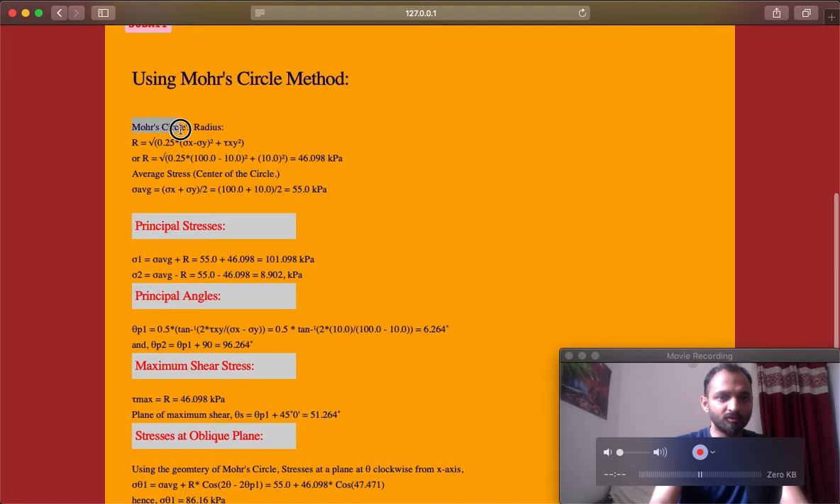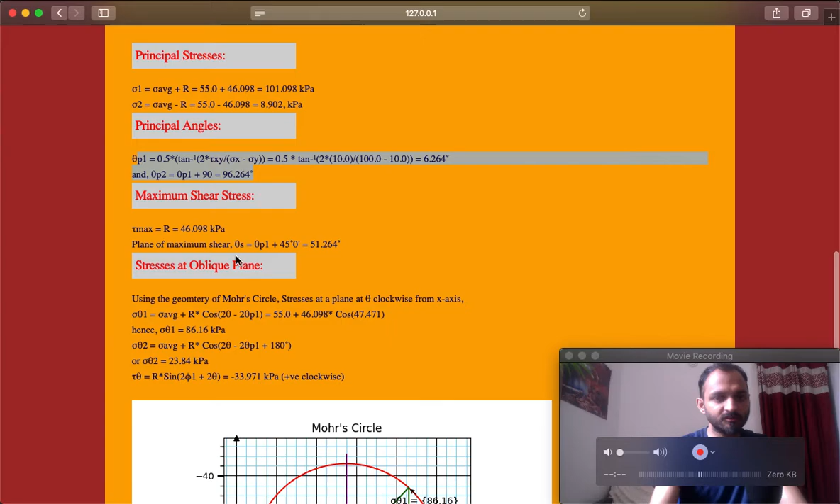Using the Mohr circle method, because we chose Mohr circle, here is the Mohr circle radius, principal stresses, principal angles meaning the planes at which these principal stresses occur, then maximum shear stress is given here. Stresses at the oblique plane, so this is your oblique plane, and this is your Mohr circle.

You can see that you get your sigma theta 1 and tau theta 1, the stresses at that particular angle theta, which is 30 degrees, and 30 degrees from this sigma x tau xy, so this is 2 theta, that is equal to 60 degrees. So this is a Mohr circle.

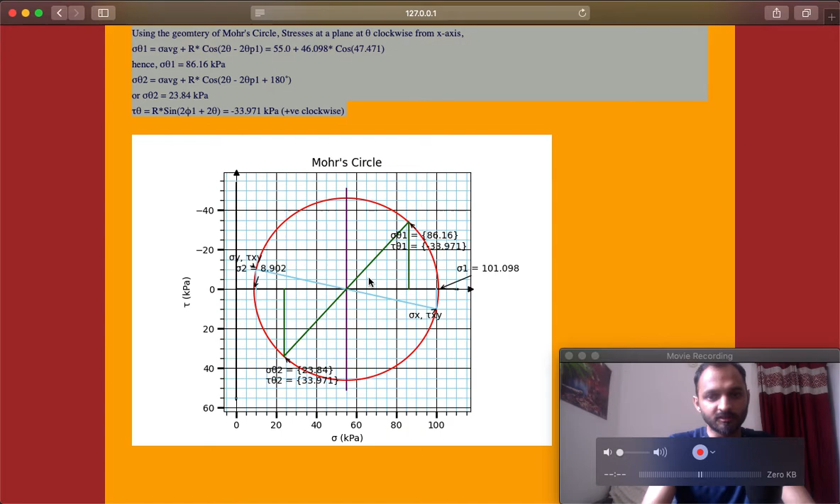Let us try some different values. Let's suppose our sigma x is 30, sigma y is minus 10, and tau xy let's take it 10 again, and theta let's take it 45, and let's choose both methods. Submit.

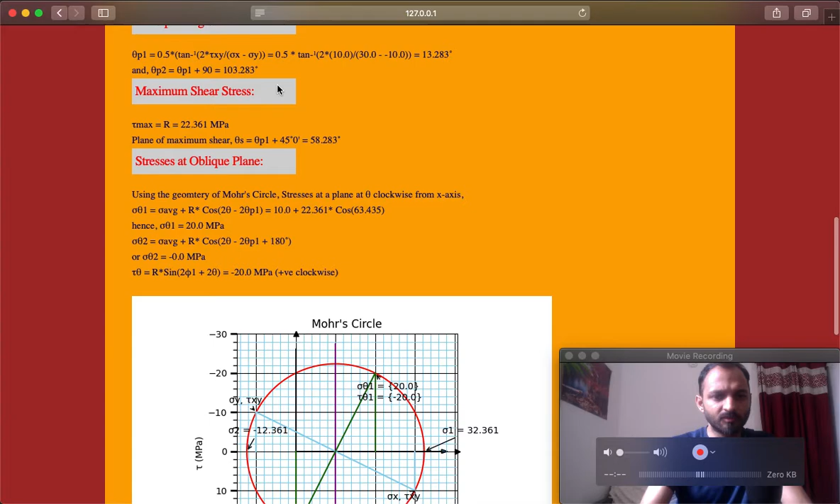Using the Mohr circle method, this is your first method. Now you can see that this plane is at 90 degrees from here, that is 2 theta, because theta was 45.

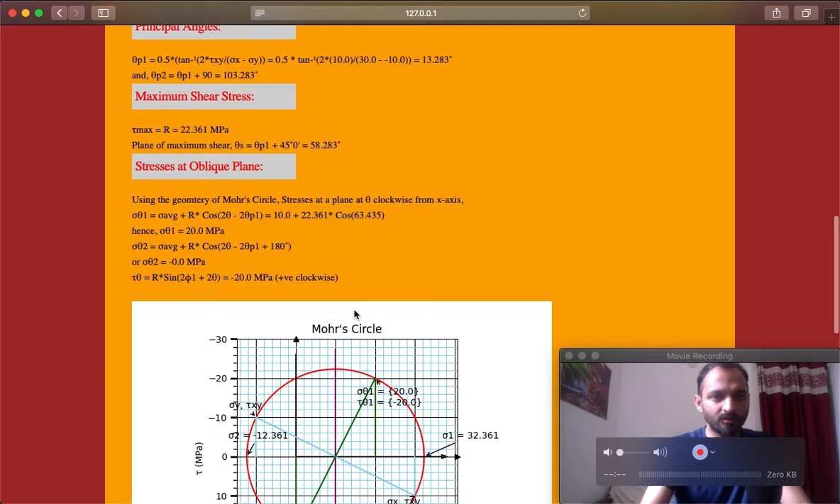Alright, so theta we have taken this time was 45. This is the Mohr circle method, and now you're using stress transformation equations. It gives you the stress transformation equations here and all the solutions using the equations. So this is your first step.

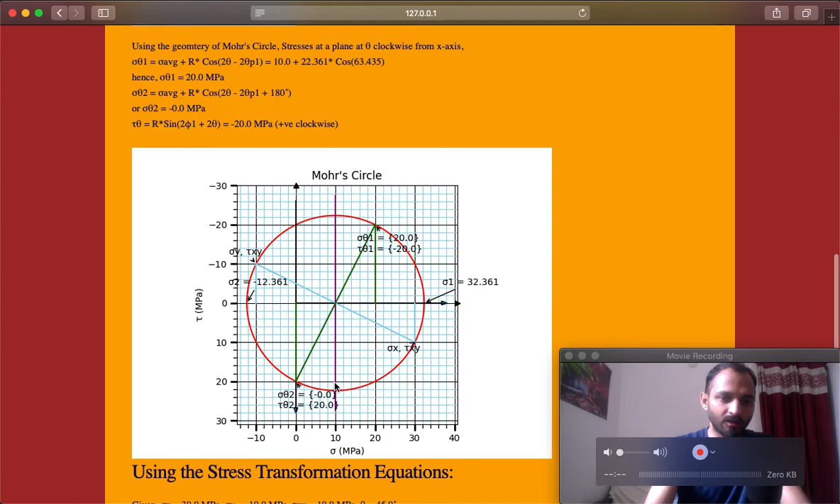You can draw a Mohr circle for any stresses, any kPa, MPa, and you can see that these units also get displayed here. So in MPa, everything is annotated, even in the diagram, not just the answer, everywhere it is annotated like this. Each step is explained, so this is programmed in such a way that your solution would be complete.

Okay, let us check now the vertical curve app, my second app here. So let us suppose, as you know, vertical parabolic curves basically work like this.

Let us suppose your grade 1 is positive 2, and the second grade is minus suppose 1.5, and the length of the curve, let us choose, is 1000. So what is given? One of the stations would be given to you, either PVC or PVI.

Let us suppose PVI is given, then you simply fill this box PVI. Let us suppose station PVI is 1500, and elevation of the PVI, let us suppose, is 200, and ordinate spacing, I mean offsets, or full station spacing, whatever is asked from your question.

They will ask to give the elevations of the station at every 30-meter interval. Let us suppose your interval here is 100 meters. So then you simply submit here, and now you will get your solution.

So this is your station PVC, x naught is station PVI minus L by 2. Station PVI was 1500 and L was 1000, so 1500 minus 500, that is 1000.

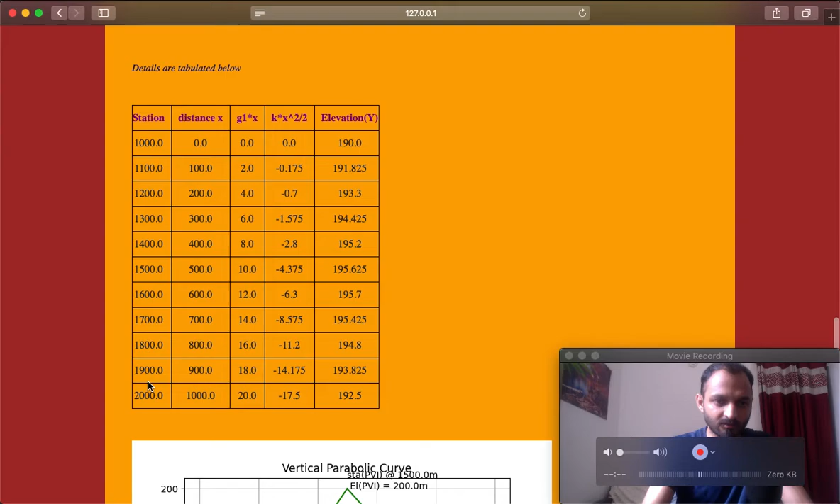So every calculation is done here, even equations are given to you, and the high point is also calculated, and the station. For full stations, you can see this table which gives full station stationings, and this is the distance from PVC. This is G1x.

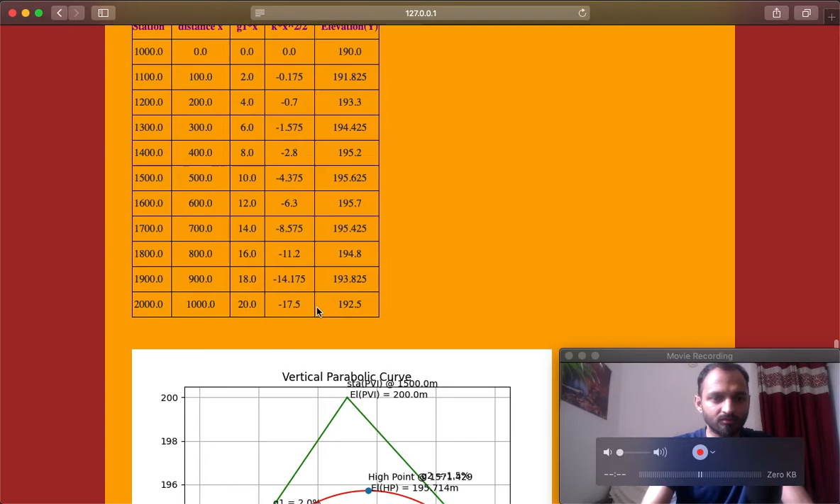I know you will know all this if you have the knowledge, or you can study everything here. Each step is given, so you simply go through it, and this is your diagram of the curve.

So this G1 was positive 2% and G2 was negative 1.5%, so this second tangent is downward, and this is your curve, and this is the high point of the curve.

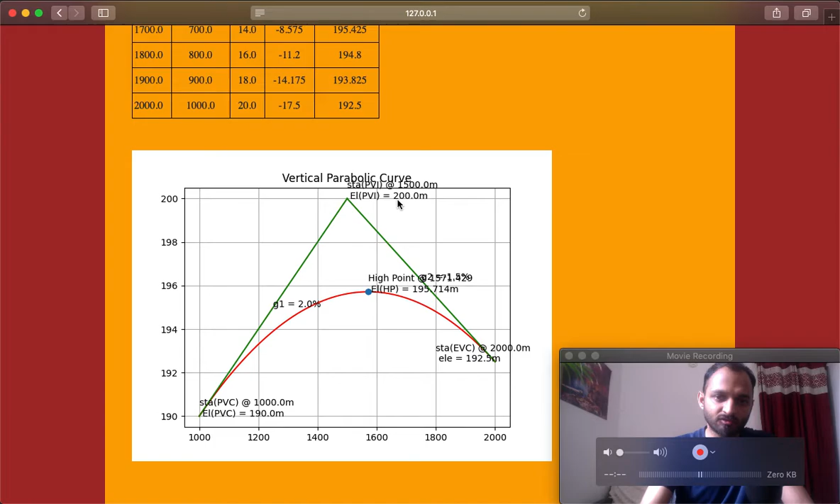This is the PVC station, this is the EVC station, that is the end station, and elevation is also annotated here, and here, and PVI elevation was 200. So this is your curve diagram.

So this is a complete solution. Now let us check the shear force and bending moment app.

Let us suppose you want to, okay, this is the input box. Let us suppose your beam length is 10 meters. Length unit, let us suppose these are the same, meter, kilonewton is the load unit, and let us suppose the number of supports. Let us take a simply supported beam as of now.

So let us suppose two supports are there, one at the left hand, one at the right hand, and let us take the number of loads, let us take one UDL, or you can take two loads also. Let us take one UDL and one point load, so the number of loads is 2.

Then submit this detail, then another form will get generated, and you have to input all the details of the loads and the supports.

Let us suppose your load number 1, that is a concentrated load, let us say it is 100 kilonewton, and let it be at the node name, let us say E, and it is at a distance of 5 meters from the left hand, so the origin is the left hand of the beam.

If UDL, since this is a concentrated load, we need not fill these boxes, let us keep them as their default value, they don't matter. Okay, this is now our second load, just ignore this one.

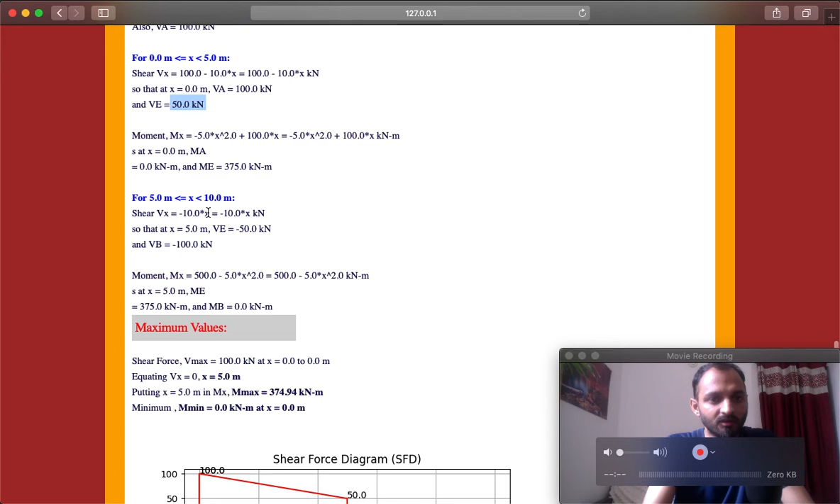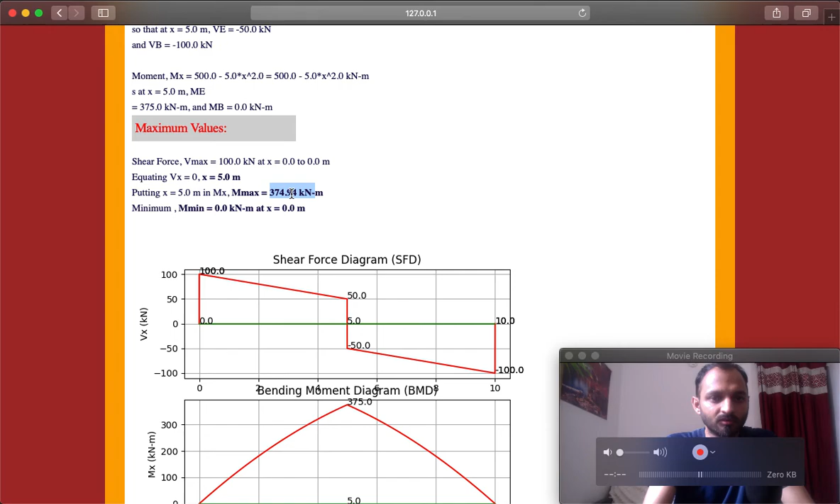It also calculates your maximum values. Vmax is 100 kilonewton at x equal to 0, and similarly the maximum moment would be rounded to 375. This is a computer calculation, so it takes a float value here. And this is your shear force and bending moment diagram. You can see this is a parabolic shape, and the gradient suddenly changes because here there is a big point concentrated load, and each point is annotated, you can see.

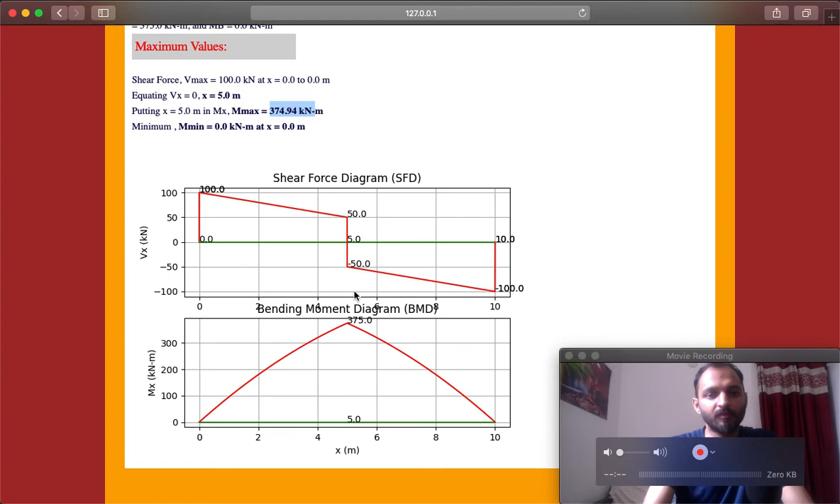So this was our third app, and this is a free article.